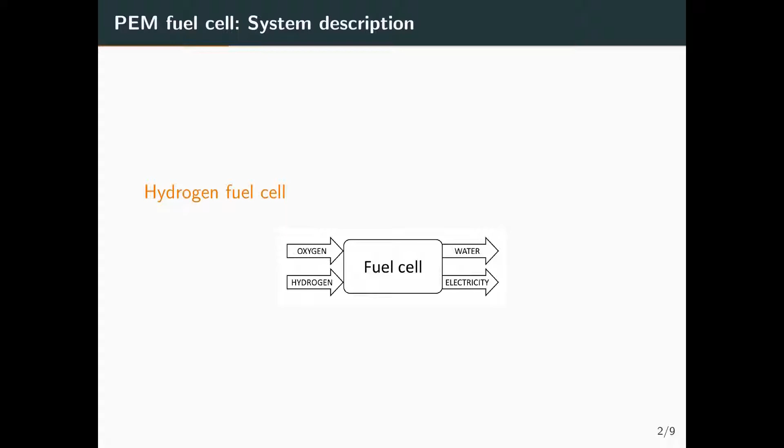The electrons generated in the reaction are conducted through an external circuit, which allows to use the electric energy. The protons generated in the anode are conducted through the aqueous electrolyte to the cathode, in order to complete the electrochemical reaction.

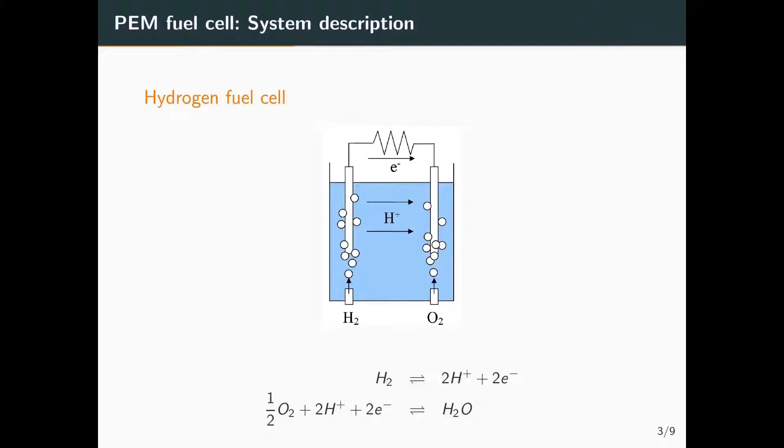There are some types of fuel cells depending on the fuel used, materials and designs. This assignment is focused on the study of fuel cells which use pure hydrogen and oxygen as fuel, and use solid polymeric electrolyte. This type of fuel cell is named PEM fuel cell, proton exchange membrane or polymeric electrolyte membrane. The solid polymeric electrolyte has some advantages compared to liquid electrolyte. High proton conductivity is the most important advantage of polymeric materials.

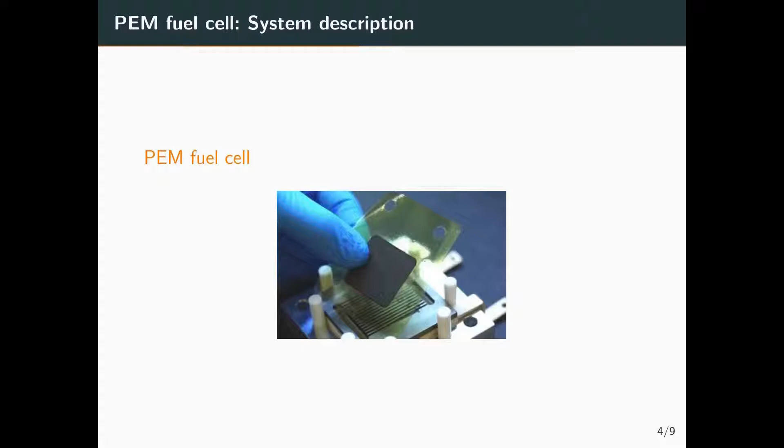The PEM fuel cell is composed of the following fundamental parts: the active layers, the diffusion layers, the terminals of the anode and the cathode, and finally the polymeric membrane that separates them. In addition, the fuel cell is composed also of a set of auxiliary components necessary to its operation, such as the seals, the refrigeration system, the humidification system, and the electric control.

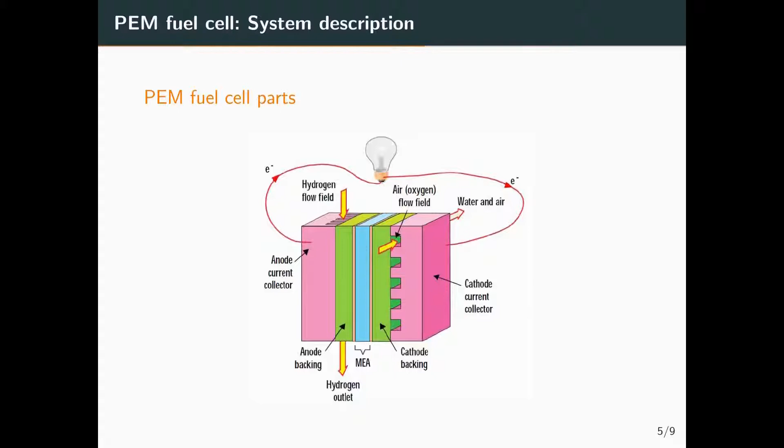Let's see some properties of the fundamental parts of the PEM fuel cell. The membrane is a solid polymer electrolyte, usually sulfonated polytetrafluoroethylene, which is placed between the catalytic layers of the anode and the cathode. The free movement of protons in the electrolyte structure from anode to cathode when the electrolyte is well hydrated is the main property of the membrane. In addition, the membrane does not allow the crossover of hydrogen and oxygen.

The active layer, also named catalytic layer, is a thin layer located between the membrane and the diffusion layer, where the electrochemical reactions are produced. The active layer usually has 3 components: catalyst, polymeric electrolyte, and the physical electrical conductor support, which is usually carbon powder. The ink, result of the mix of these components, is deposited on the surface of the diffusion layer of the anode and the cathode or on the membrane surfaces. Membrane, active layers and diffusion layers are usually named MEA, Membrane Electrode Assembly.

In order to optimize the electrochemical reaction, the oxygen and hydrogen molecules should be close to the catalytic particles, as well as to electric and proton conductors. The most common catalyst used in the active layers is platinum.

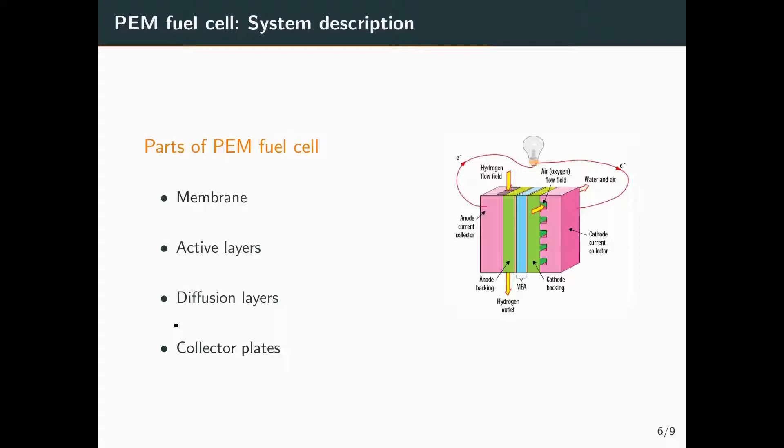The collector plates are one of the most expensive components, as these are usually made in graphite or in machined metals. Some important physical properties of the plates are high electrical and thermal conductivity and being impermeable to gases and liquid water. The plates are usually designed with channels which allow the adequate distribution of gases and the evacuation of excess water.

Modeling and simulation have been widely used in the study of PEM fuel cells. For example, the modeling of gases and liquid water diffusion in the porous media is extensively studied, since the access of the fuel to the catalytic layer in the presence of liquid water is one of the most important topics. Also, the dependence of membrane conductivity on the amount of water and the influence of other design parameters on the cell's electrical performance are of great interest.

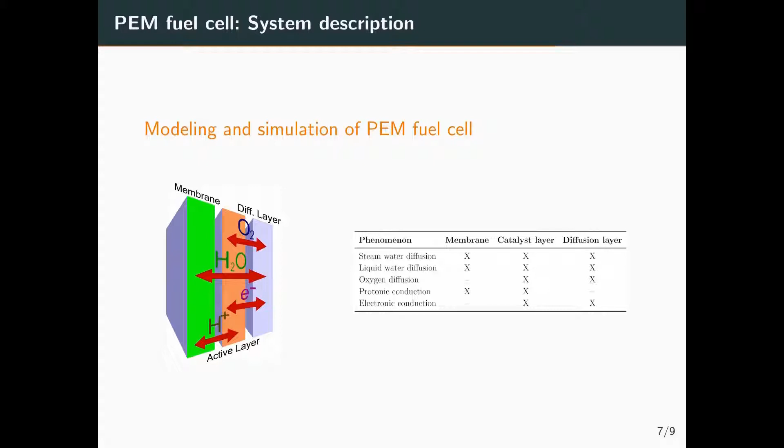In these presentations, some modeling tasks related with the fuel cell modeling will be proposed. The proposed modeling tasks have been arranged in order of increasing complexity. In task 1, the diffusion of a gas in a porous media will be studied. The objective of this task is to model the one-dimensional diffusion of gas in a porous material, with the aim of analyzing the spatial distribution of the gas pressure and the molar flow rate in response to changes in the gas pressure applied at one end of the material. This task is an introduction to the control volume technique, which is applied in the other tasks to model the dependence of physical quantities with respect to the spatial coordinates.

In task 2, the diffusion of a binary mixture of gases and a liquid in a porous media will be proposed. The model developed in task 1 is extended to describe the molar balance and the diffusion of oxygen, steam water, and liquid water. As in task 1, it is assumed that the diffusion of the species occurs only in one direction and the porous medium is divided into control volumes along that axis. The balance of steam water and liquid water due to the evaporation and condensation processes is taken into account.

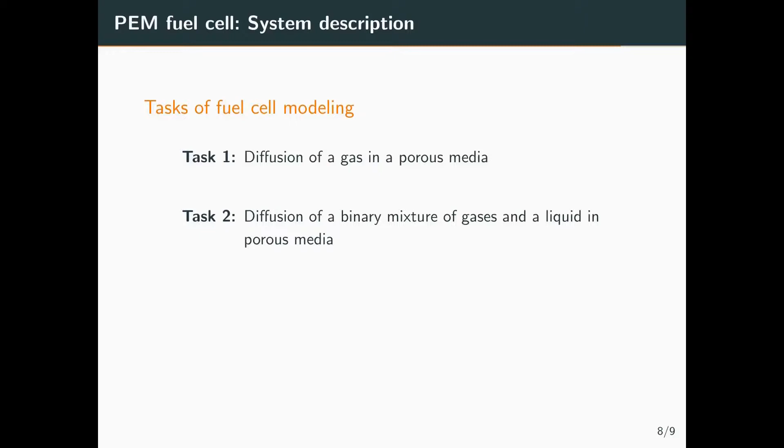In task 3, the electric conduction and electrochemical reaction and complete model of the fuel cell are proposed. The objective is twofold. Firstly, to model the electron and proton conduction in the membrane, the catalyst layer, and the diffusion layer of the cathode. Secondly, to model the electrochemical reaction that takes place in the catalytic layer. Combining this model with the models developed in the previous tasks, the complete model of the PEM fuel cell is obtained. Finally, the model of the electrical circuit to polarize the PEMFC model is developed.

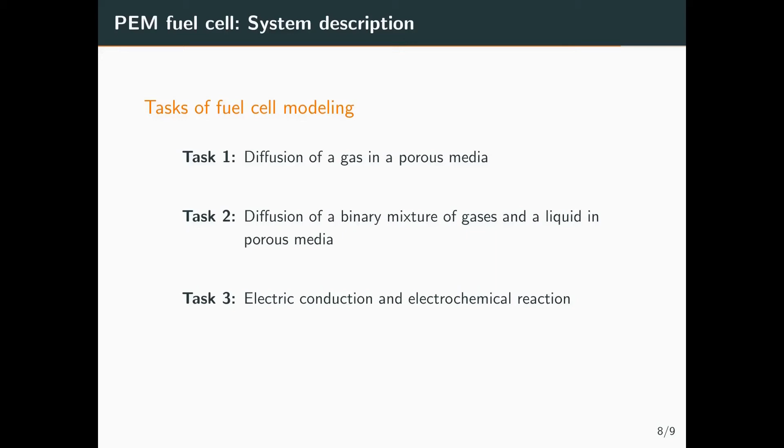In order to increase the knowledge of fuel cells, an additional bibliography is recommended.